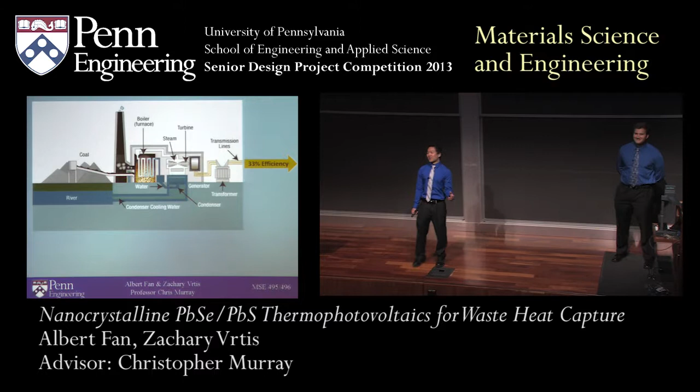And while we don't have a cure for senioritis, what we can do is capture some of the waste heat given off by these power plants using thermophotovoltaics.

And so the idea behind a thermophotovoltaic, or TPV, is that you're directly converting heat into electricity. And this operates the same way as a regular photovoltaic or solar cell, except you're calibrating them for the infrared spectrum instead of the visible.

And the nanocrystals we explored for this are lead selenide and lead sulfide. Now, I know what you're thinking - lead selenide, lead in general, highly toxic, highly dangerous. This is true. However, we like to live dangerously, and we were also excellently safety trained by the Murray group.

And the reason I bring this up is because these nanocrystals are actually highly sensitive to oxygen. So most of the work that we've done with them, actually fabricating these devices, has been done in an inert nitrogen glove box. So we haven't been directly exposed to these, we hope.

But in all seriousness, lead selenide and lead sulfide are highly advantageous because their band gaps are highly tunable when they're quantum confined. So when you bring the size of the nanocrystal below the average distance of the electron to the nucleus, you actually remove energy states. And the general trend that you see is that the smaller the nanocrystal, the larger the band gap.

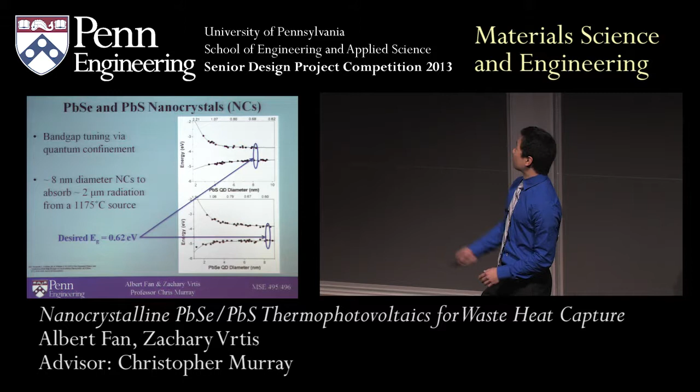Now for our applications, we're targeting nanocrystals that are about 8 nanometers in diameter. This is to absorb wavelengths that are about 2 microns in length. And then this gives us a corresponding band gap of about 0.62 electron volts for these particles.

Now, my name is Albert Fan. This is Zach Vrtis, and this semester we've been working in the Murray group to take these nanocrystals, spin them into films, and ultimately build an optimized device for waste heat capture.

Now, since I've given you an introduction to the particles, I'll go through very briefly fabrication for our devices, and then some of the goals and methods we had for this project that we laid out at the beginning of the semester. And Zach will talk through some of the characterization tests that we did and the impact of our work.

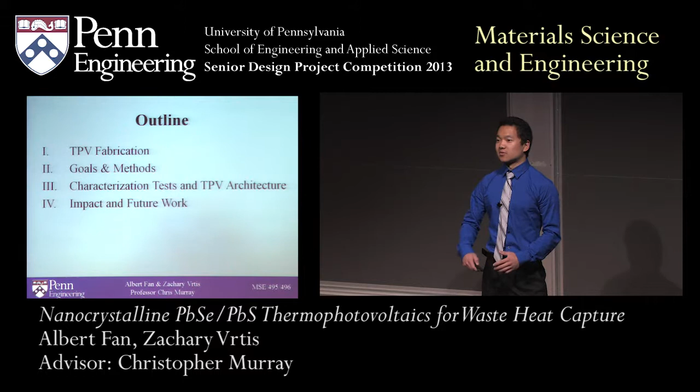And so, our nanocrystals, as synthesized, have oleic acid attached to the surfaces, and this keeps them suspended in solution and separate from one another. It stops them from conglomerating.

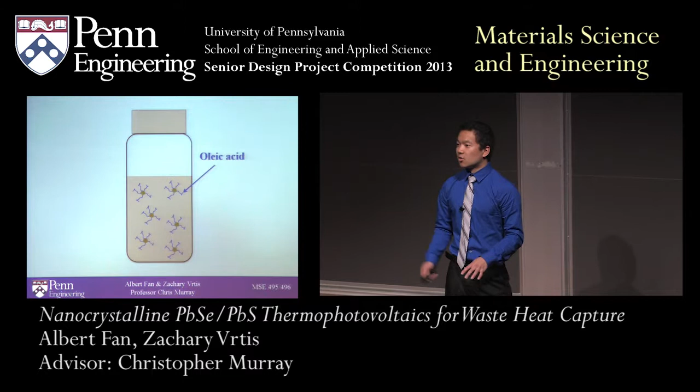When we're actually spin coating in the glove box, we have our patterned ITO substrate, put on a drop of the nanocrystals, and then after spin coating, we still have the oleic acids keeping them separated.

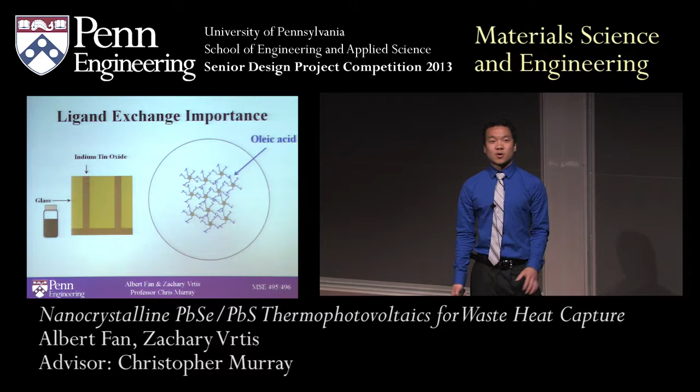Now, this poses a problem because oleic acid is fairly bulky and makes charge transport through these films rather difficult. So the next step for our project is to carry out a ligand exchange, replacing the bulky oleic acid with a much shorter stabilizing ligand.

And the 5 that we explored for this were thiocyanate, tetrabutyl ammonium iodide, bromide, and chloride, or the halides, and benzene dithiol, or BDT. Now, if you've carried out a ligand exchange successfully, what you'll find is that the packing density increases.

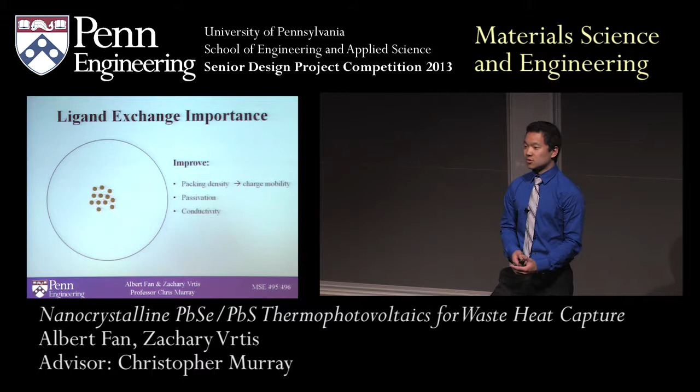You have better charge mobility, you passivate the surface of your nanocrystals, and overall the conductivity of your film will increase. And so you're actually going to repeat this process, spin coat, ligand exchange, and then rinse several times until you build films of your desired thickness.

Once you have this thickness that you want, for actually creating the TPV device, the last step is to deposit aluminum contacts via thermal evaporation.

And then the actual very last step is to take chloroform. You want to wipe off the bottom layer of nanocrystal so you have your bottom contact.

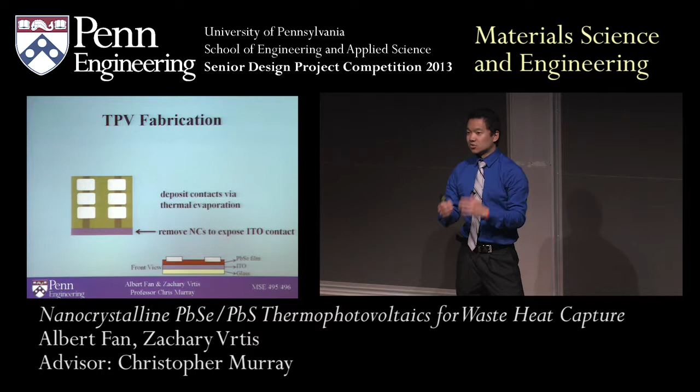So geometrically, device architecture, you have your aluminum contact on top, you have your nanocrystal layer sandwiched in between, and this is when heat hits it, you'll generate your carriers. If you have the right architecture for your device, you can actually separate them and collect that charge.

And so our goals for this project were really threefold. The first two was to evaluate the effects of different ligand exchanges on our film properties.

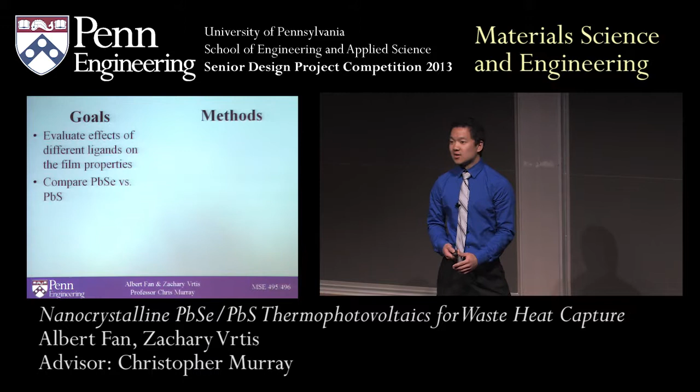Secondly, we wanted to directly compare lead selenide to lead sulfide head-to-head. To do this, we performed a battery of characterization tests, which Zach will get into a little bit.

The ultimate end goal is to create a working TPV device, and we did this by taking the best nanocrystal ligand combinations from the characterization tests and then optimizing the device architecture. And then, if you give us 10 more years and millions of dollars of funding, eventually bring this to the stage where we can commercialize it and actually install it into power plants.

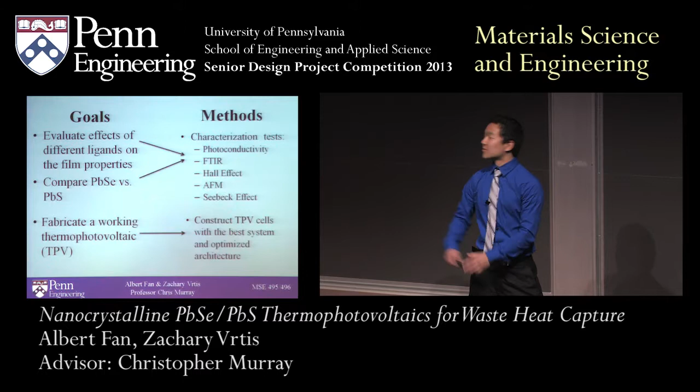Visually thinking about our project, you can think about it as split between using different pre-treatments, which I haven't really gotten in depth into, but if you have any questions about it at the end, I'd be happy to answer. So combining different pre-treatments with lead selenide, lead sulfide nanocrystals, and then with a different ligand exchange, explore these, optimize them, and ultimately build a working device.

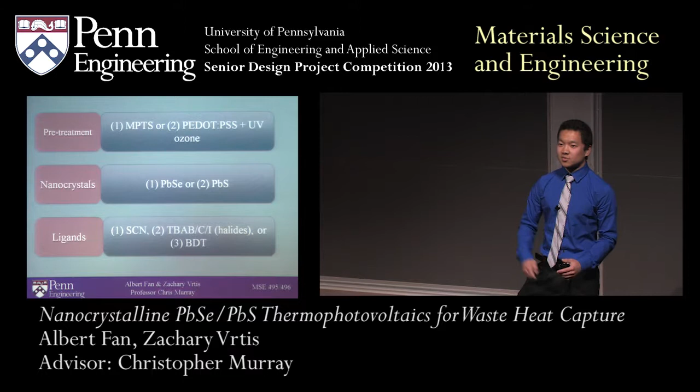And so with that, I'd like to pass it off to Zach, who will talk about some of the testing that we did. Thank you very much, Al.

The first two characterization tests we ran were photoconductivity and Fourier transform infrared spectroscopy tests, or FTIR. These first two tests were a great one-two punch that allowed us to reduce some of those combinations of nanocrystals and ligand exchanges that Al so well introduced to us, so that we didn't waste our valuable time making cells that were probably not going to work.

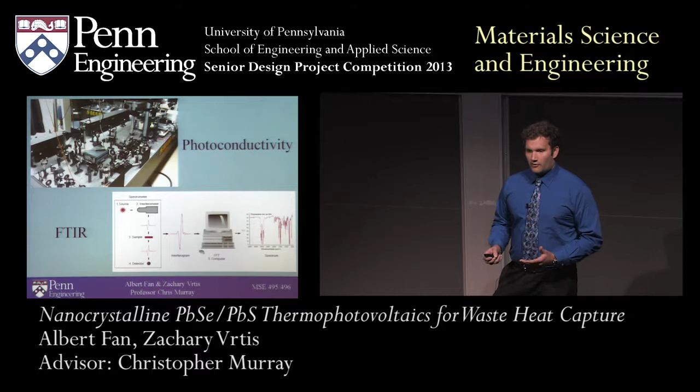Photoconductivity is a proof of concept test that allows us to measure the current flow under both dark and illuminated conditions. It's that change in current flow that's crucial to determining how effective the electronic properties of our nanocrystal films are. FTIR allows us to look at the infrared absorbance spectra of our films in order to determine how likely it was that a ligand exchange occurred.

Now looking at lead sulfide, we again see the photoconductivity data, and again we see a little bit better of a change in current flow for TBAI, but again excellent current flows for both. Let's compare it with FTIR again. For FTIR, this time we see a good reduction in these oleic acid peaks using the TBAI exchange.

So Al and I were able to identify BDT as the ligand exchange of choice for the lead selenide system, and TBAI as the ligand exchange of choice for the lead sulfide system. This came about after about a semester and a half of work, and we were building TPV cells in conjunction with this. Al and I were tempted to call it a day at that, but we overcame that 33% efficiency barrier we talked about earlier, and we moved on to another test, which was the Hall effect test.

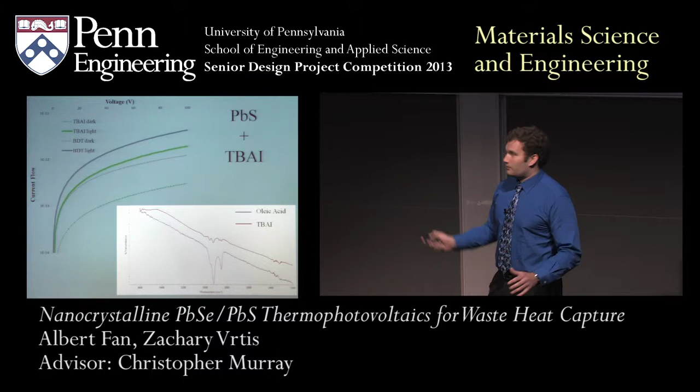These allowed us to dive more deeply into the electronic properties of our films, and these were only performed on the ideal combinations that I just mentioned. The Hall effect test gave us very preliminary results, and we don't have enough test runs yet to provide you with quantitative numbers, but there are three important findings that I'd like to share with you.

The first finding was that the lead selenide films appeared to be more conductive, and the crucial one was that TBAI actually led to better conductivity than the BDT exchange, suggesting TBAI is the ligand exchange of choice for both films. We also determined that the majority carriers of our films were holes, which is crucial for any electronic characterization moving forward.

I'd also like to mention that Seebeck was another characterization test that was run, but unfortunately our films proved too resistive to get an accurate test. So that is another future step to take.

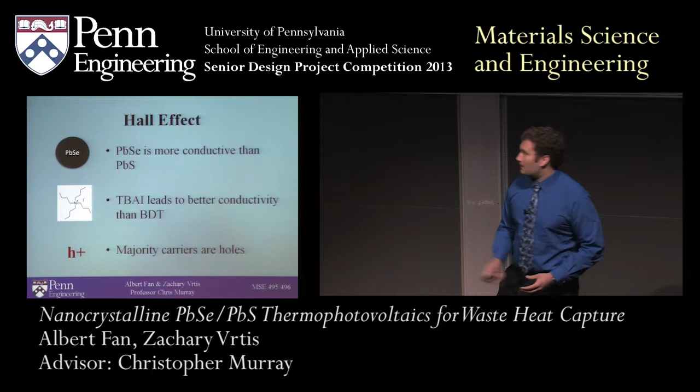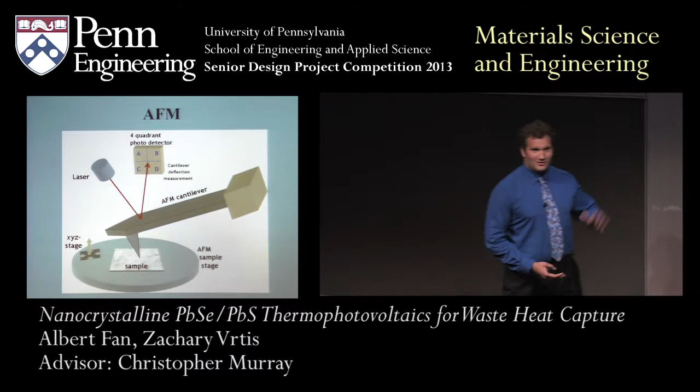The next thing we did was AFM testing, or atomic force microscopy. As things typically happen in the lab, some crucial equipment went down just as we needed it, so we decided to turn to AFM results, and it turned out to be a great idea.

It allowed us to determine the thickness per spin coat of our two different nanocrystals. We found we were depositing 30 nanometer thick layers versus only 13 nanometers for lead sulfide. This was very helpful for forming TPV devices, since we could determine exactly how thick our layers were and therefore how many spin cycles were needed.

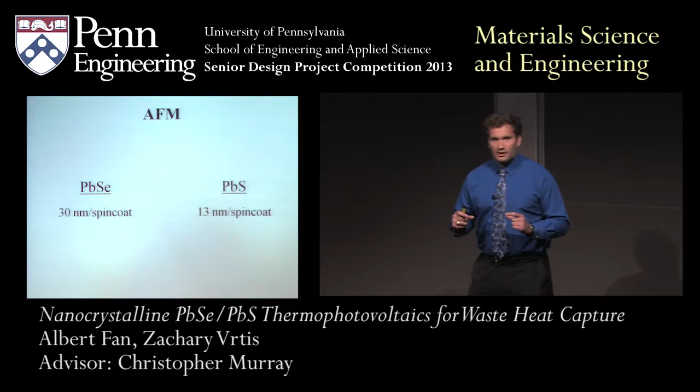So then, let's get into the TPV cell fabrication. The first architecture used for trials 1 through 10, as Al mentioned, used aluminum and ITO as our two electrodes with a nanocrystal layer sandwiched in between.

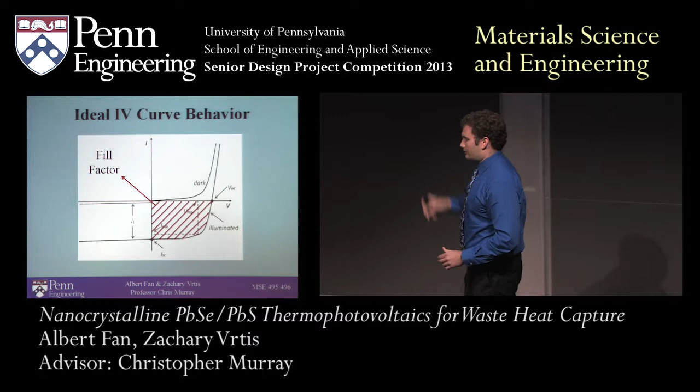If we made the correct devices, this is the ideal IV curve behavior we should see, with the open circuit voltage and short circuit current right here, and most importantly an excellent fill factor, which is proportional to the efficiency of the cells. So let's see how we did.

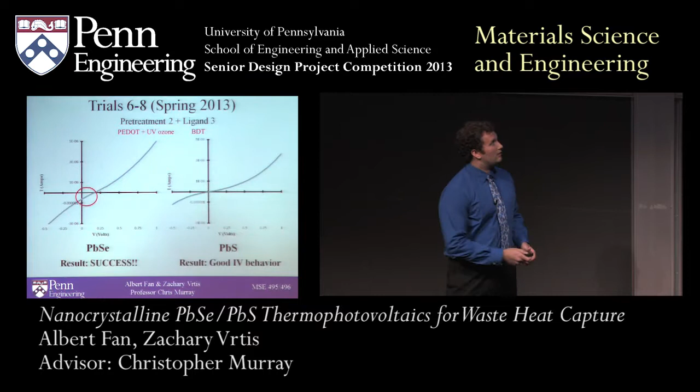For trials 6 through 8, with lead selenide nanocrystals performed with the BDT exchange, we see that we actually have a small fill factor here. This is only about a 0.02% efficiency, so it's not that good.

But this is one of the first TPV cells to be fabricated with these nanocrystal systems, so it's an excellent step in the right direction and a good building block for future research. In addition, we see good rectification behavior for the lead sulfide system.

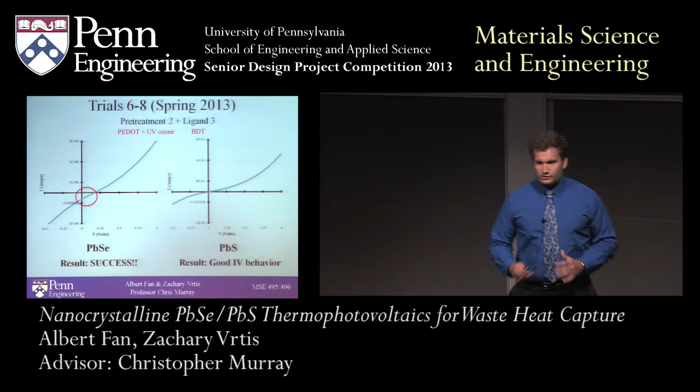From this point, Al and I consulted our advisor Dr. Chris Murray, Ashley Galding, and other students, as well as the literature, and determined that adding special blocking layers within our architecture—calcium contacts for hole blocking layers, and molybdenum trioxide for electron blocking layers—would help optimize the current flow through the device.

This is what we did to make trials 11 through 14. Now these cells are fabricated and ready to go, but again some more crucial equipment went down on us, and I promise it wasn't our fault. They're ready to go, but unfortunately have not been tested yet. That's the next step, as I'll be here next semester, and that'll be the first step I take.

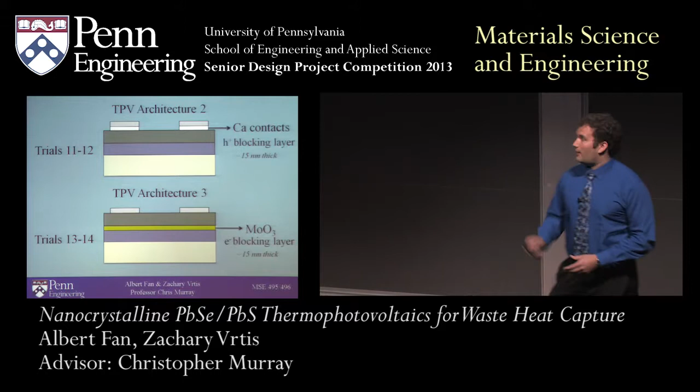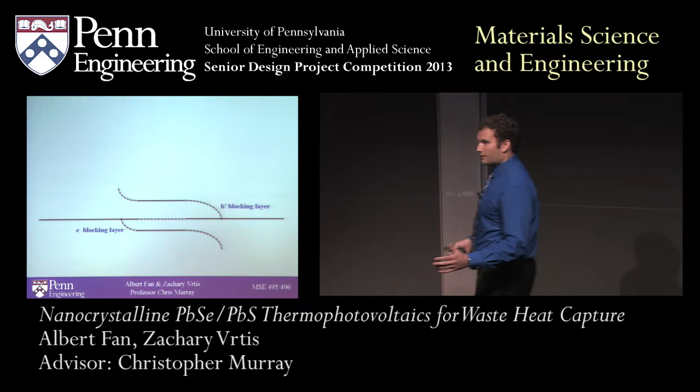Finally, adding those two together, we can develop an optimized cell architecture using both of these layers. Let's look at the band structure of this final architecture. We can see that the electronic states of each layer lend themselves beautifully to forming the band bending we need to form the blocking layers, in order to optimize current flow, which, when these devices are hit with heat, will generate an excellent voltage for us.

So I'm going to summarize things up here for you really quick. Over the course of the year, Al and I analyzed 5 ligand exchanges, 2 pretreatments, and used 2 nanocrystal systems, and arrived at BDT with the lead selenide nanocrystals and TBAI with the lead sulfide nanocrystals as the ideal systems.

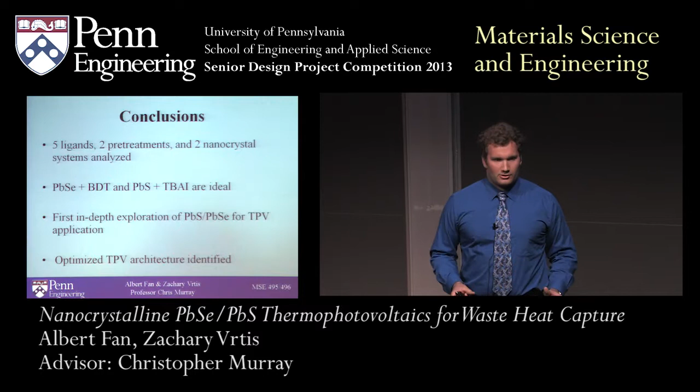Moreover, this was one of the first in-depth analyses of these two nanocrystal systems for TPV application. Finally, we were able to identify the optimized architecture, which will be so useful for future work in this area. So going on the future work tangent, let's talk about that.

The first thing we could do is take those lead sulfide and lead selenide nanocrystals and coat them with a cadmium sulfide or cadmium selenide layer or shell, which will help passivate the surface trap states, as well as prevent particle fusion under high temperature operation for TPV cells.

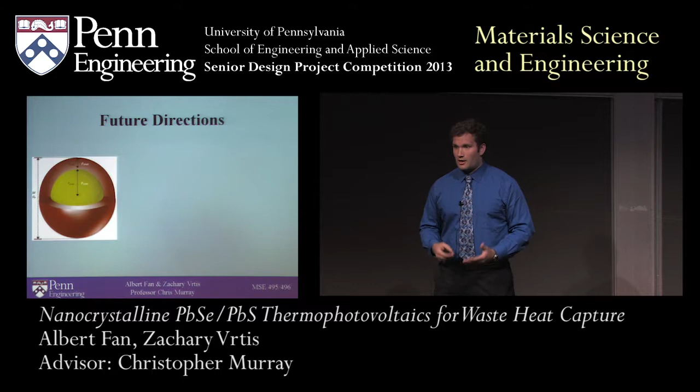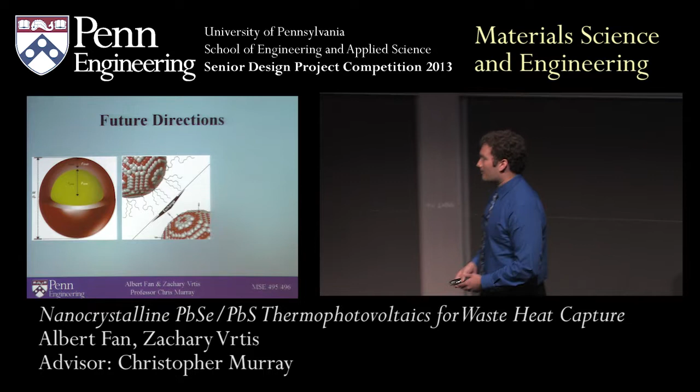Additionally, we will do additional characterization tests, particularly more Hall and Seebeck tests, in order to better understand the electronic properties of these films. And finally, testing of that ideal architecture that we identified.